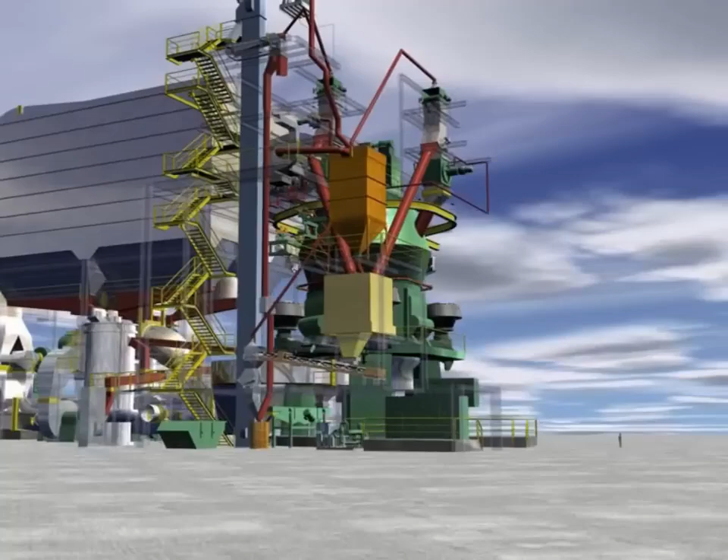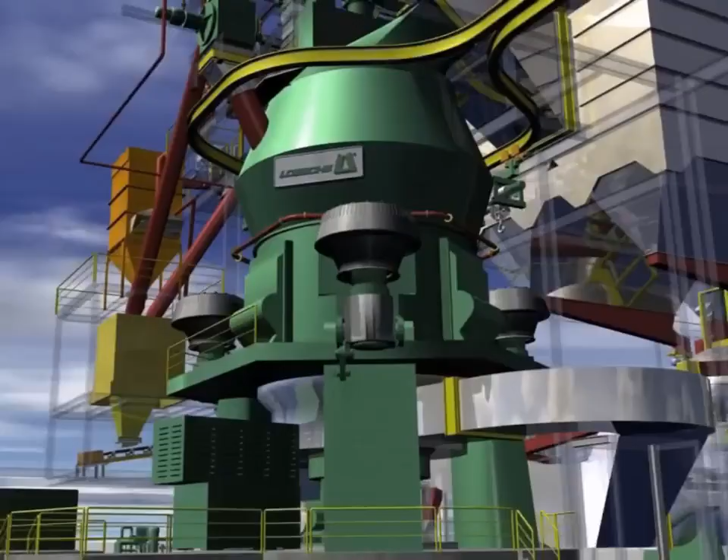Here you see, in the form of a 3D project presentation, a complete cement grinding plant equipped with an LM 56.3 plus 3C for 260 tons per hour OPC. This modern CAD method is the current state-of-the-art at Loesche for the planning and design of entire plants.

What we are now going to show you is a flow sheet of a cement and blast furnace slag grinding plant using an LMCS Loesche mill. The number of bunkers reveals immediately that both single components such as cement clinker and blast furnace slag can be processed, as well as mixtures of these in combination with aggregates.

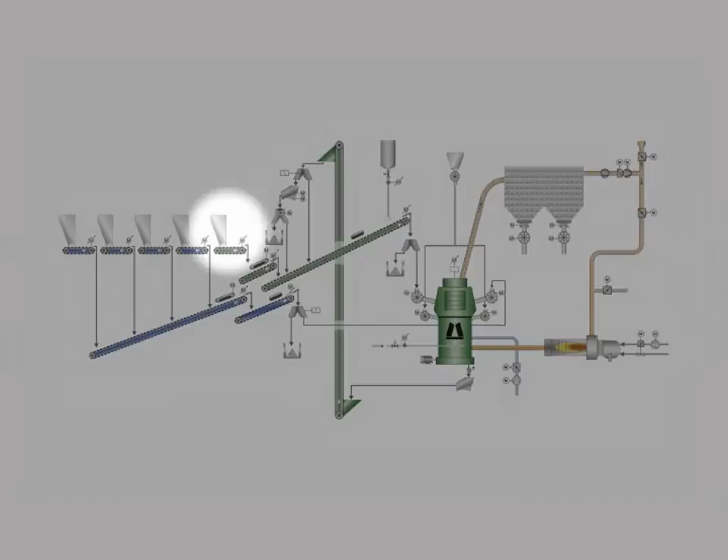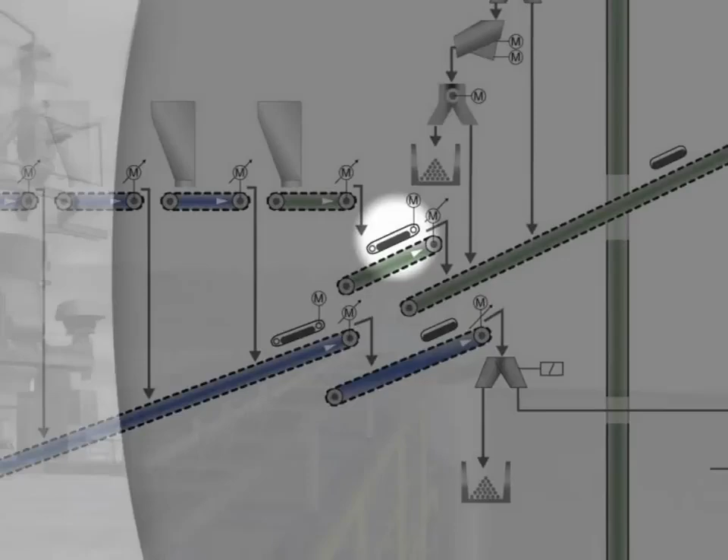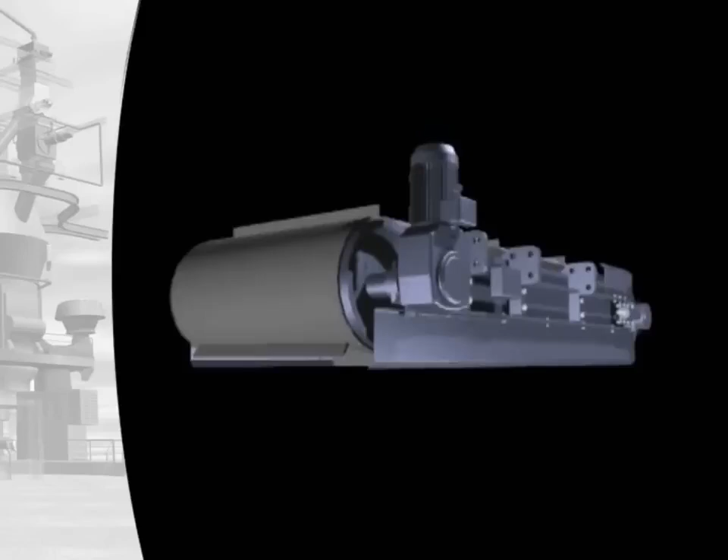Dry cement clinker is drawn from this bunker by a conveyor-type weighing machine. On the subsequent conveyor belt, foreign ferrous matter is separated by a transverse magnetic separator arranged above the belt. Non-magnetic metals are removed by a metal detector.

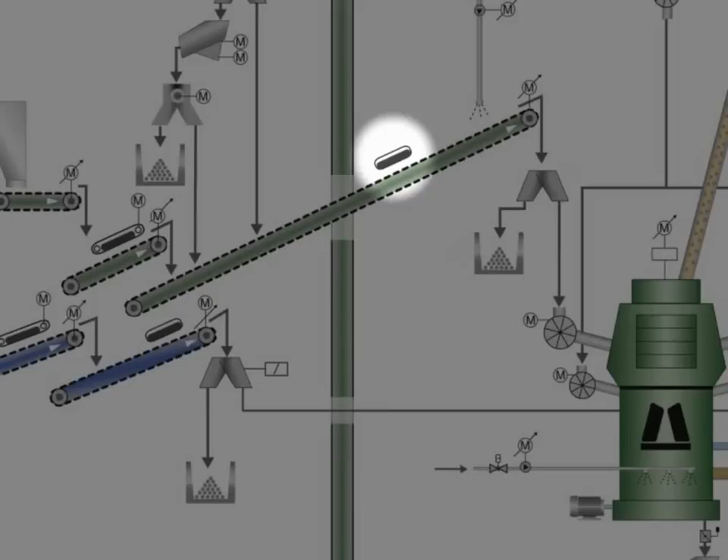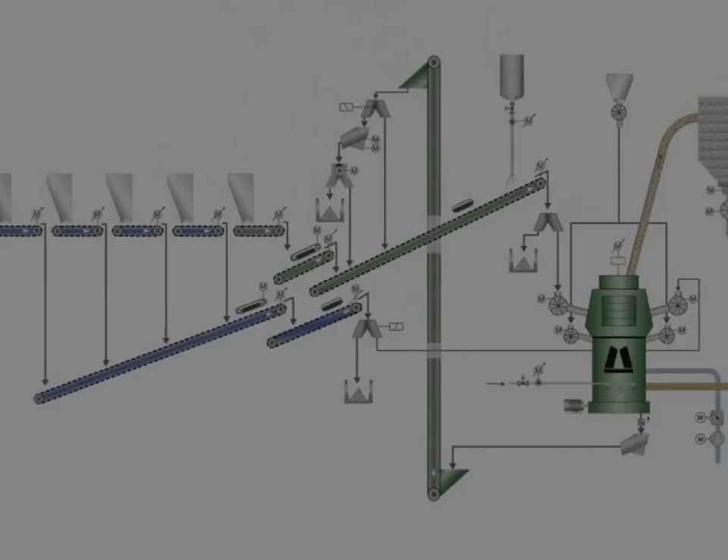These non-magnetic metals are disposed of by deflecting material from the belt. The material to be ground, now free from foreign matter, continues along a further conveyor and goes through the rotary valve and arrives in the Loesche mill. Moist material to be ground is treated in a similar manner.

Extremely fine and dry aggregates, in particular fly ash, are fed from a separate bunker into the mill through separate conveyor lines. Grinding aid stabilizes the grinding bed and is used at the request of the customer.

The water injection system is intended to condition both the grinding bed and, if required, the hot gas flow. The necessary process gas for the mill is produced by a hot gas generator. The flow of hot gas dries the ground material and conveys it to the classifier.

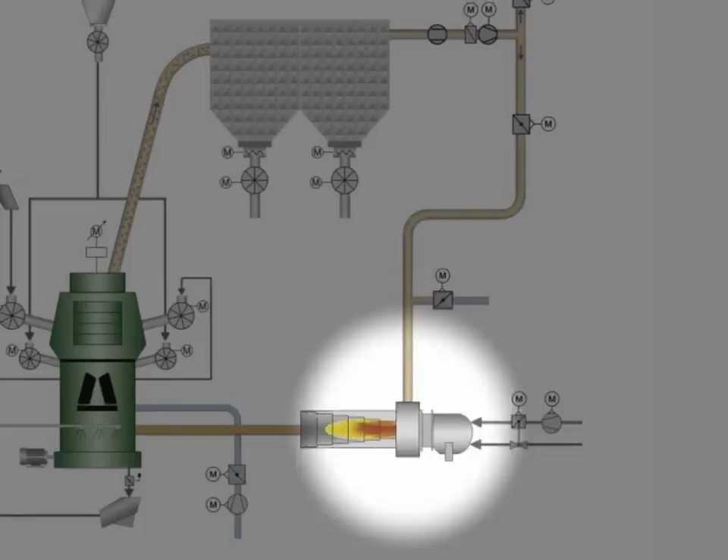The mixture of gas and pulverized material leaves the classifier and is separated downstream in the filter. The clean gas is discharged through the chimney. For energy-saving reasons, part of the process gas flow is recirculated to the mill via the hot gas generator. The fan conveys this gas through the entire plant.

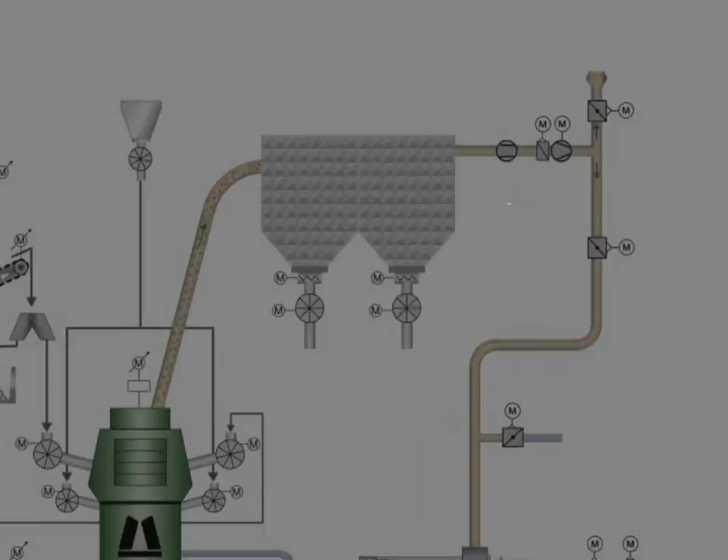Any coarse material rejected by the mill is recirculated by means of a bucket elevator to the long conveyor belt of the reject system.

The principal element of the above described grinding plant is certainly the Loesche mill with its classifier. Here are the main components.

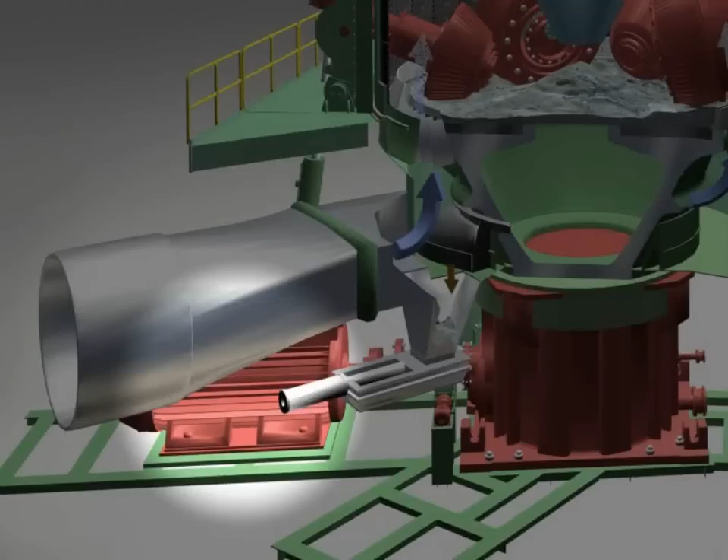An electric motor serves as a drive for the mill gearbox via a coupling. The grinding table is supported and driven by the gearbox.

The material to be ground flows over wear-resistant grinding plates that are installed in the upper surface of the grinding table. The grinding bed is crushed as it passes beneath the stationary rollers.

Cement clinkers and blast furnace slag must be crushed to grain sizes of between 2 and 50 microns. These ultra-fine products, in the form of dust clouds in a highly aerated condition, can only be kept under control by taking special precautions.

The grinding bed is de-aerated and compressed by small preparation rollers. The actual grinding is performed by large grinding rollers under the application of high pressure.

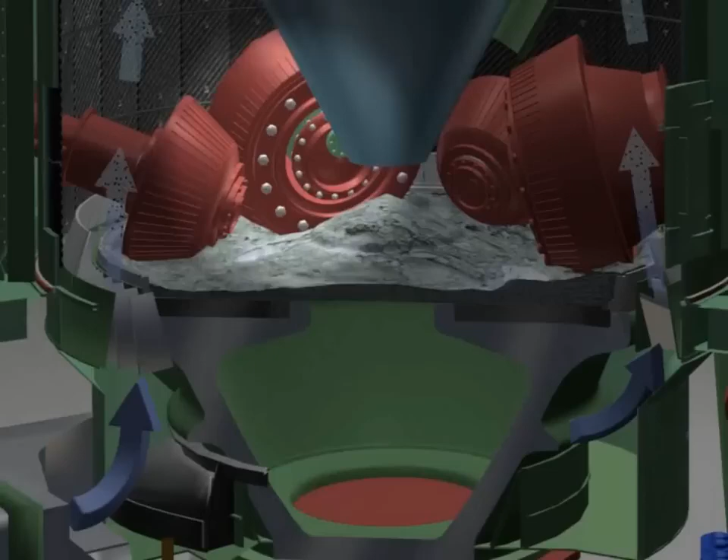All rollers, mutually independent of each other, are precisely guided in rocker arms and are supported by the structure of the mill.

The grinding table sits in a gas ring duct that is supplied with hot process gas through the gas ducts. The hot gas is directed into the grinding chamber through a louvre ring.

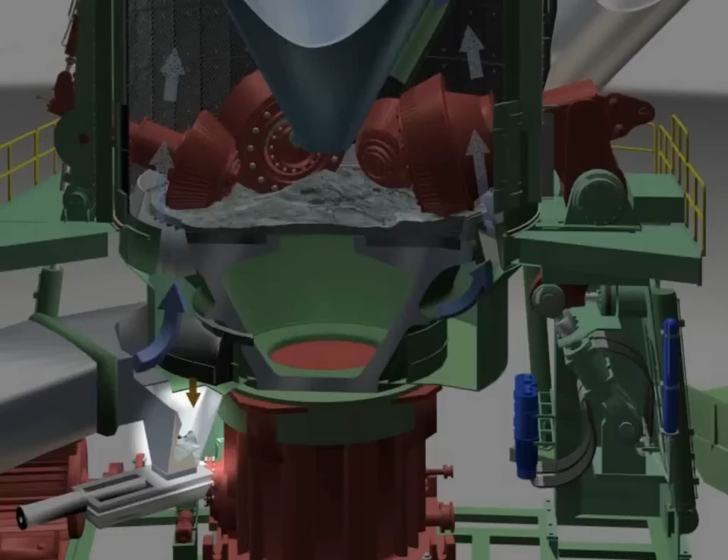The rejects drop through the louvre ring into the ring duct and are removed by the rotating scrapers. The ground material is dried in the hot gas stream and is conveyed to the classifier.

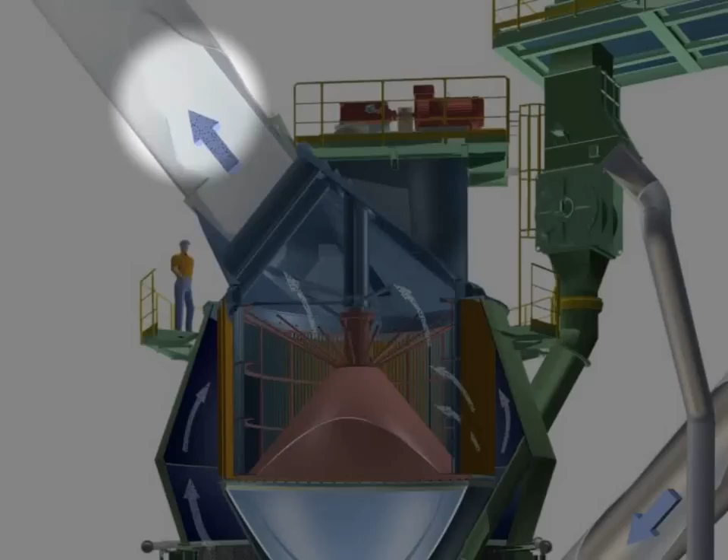The finished material passes the classifier and the mixture of gas and pulverized material flows through the ducting to the filter.

Oversized material is rejected by the classifier. It drops through the grit return cone back onto the grinding bed, where it mixes with the feed that is supplied to the mill through the rotary valve and the feed chute.

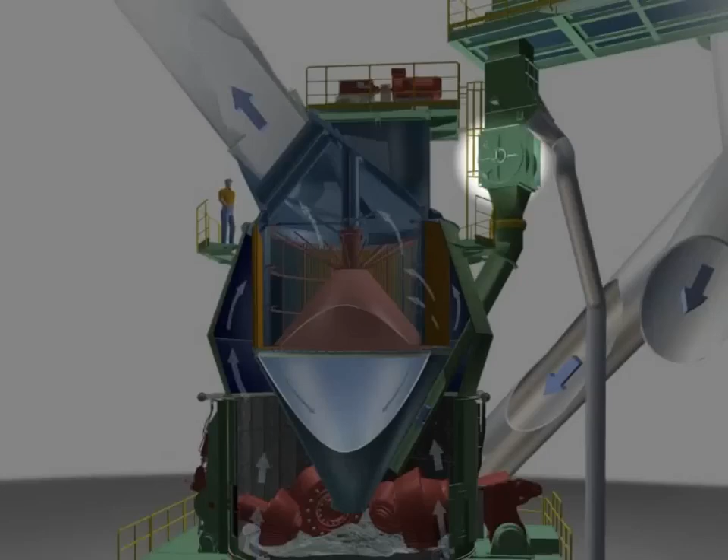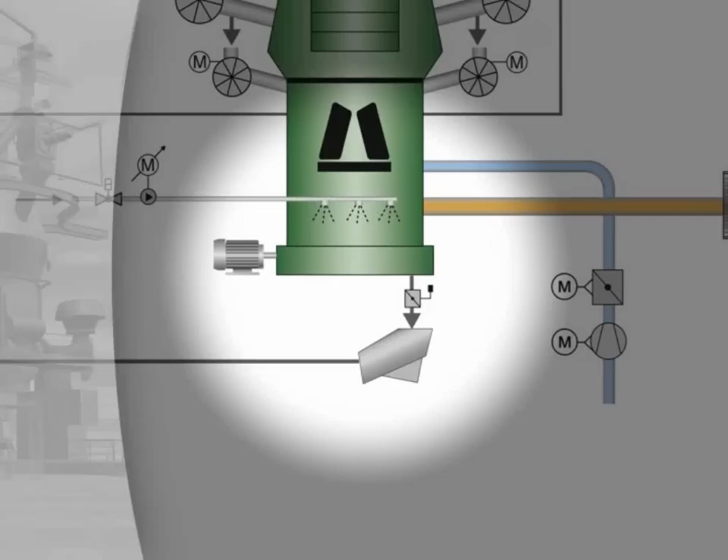Loesche mills are conceived to be service-friendly. The gearbox and rollers can be installed and removed without dismantling the mill.

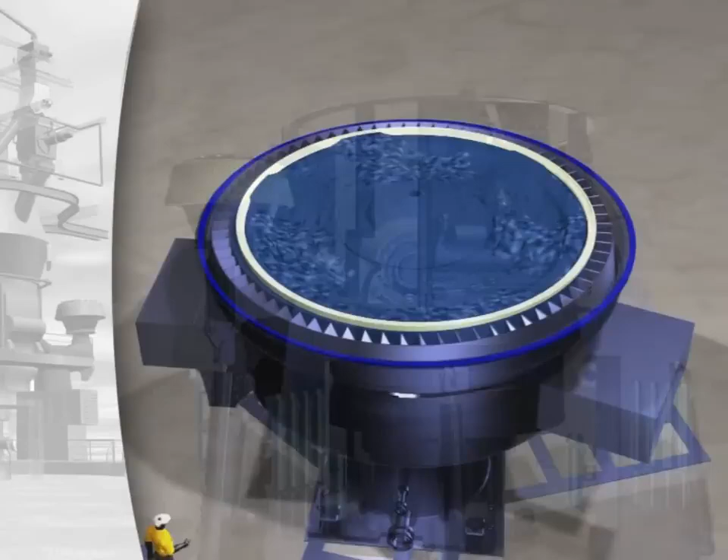The grinding plates, with swing-out rollers, are also readily accessible for quick exchange.

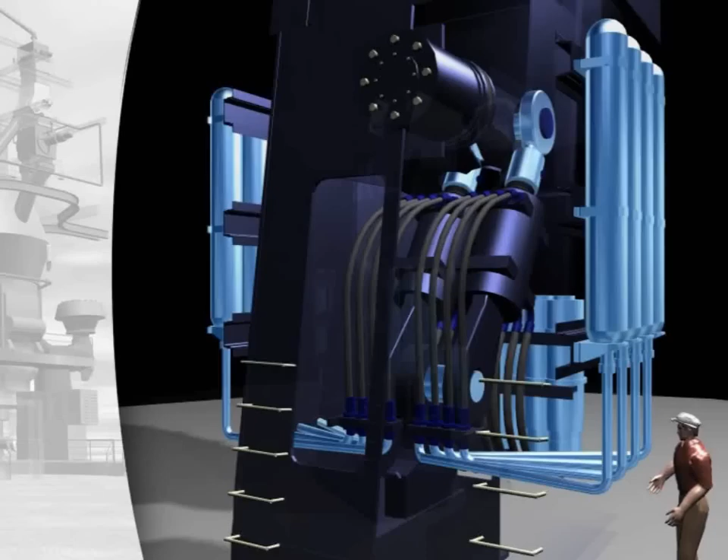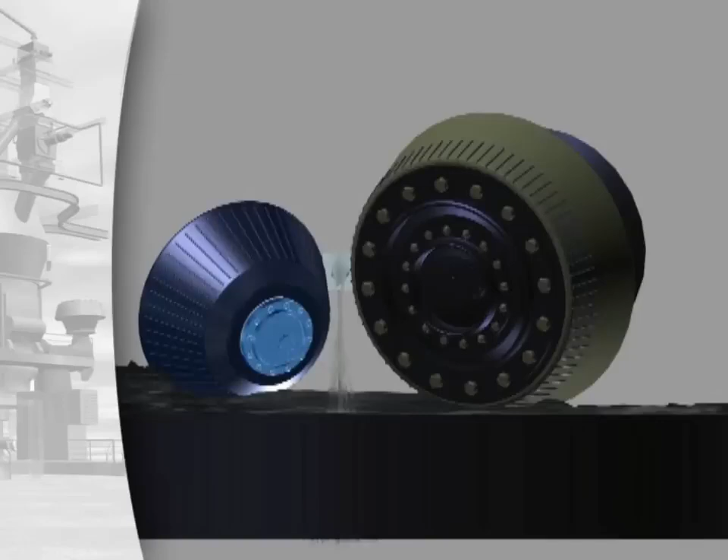The components of the hydro-pneumatic spring system for the rollers are installed in a pedestal outside the grinding space, where they are also freely accessible during grinding operations. Here you see the interaction of the preparation roller and grinding roller, and also the water injection between the rollers.

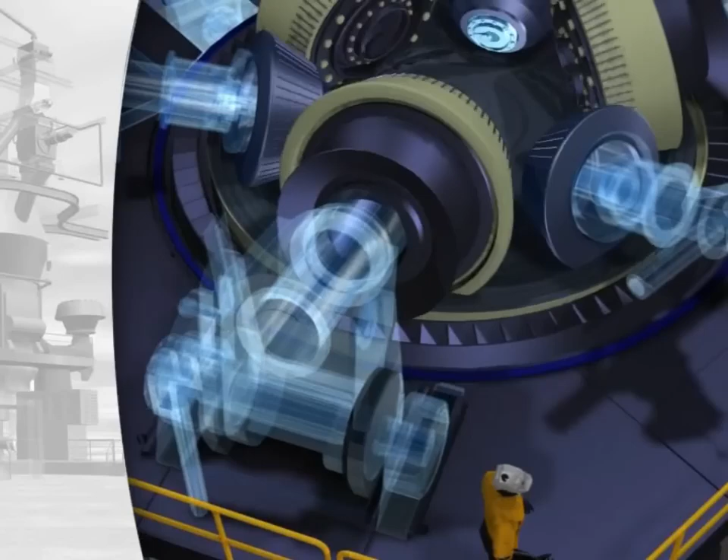A classifier, a type LSKS dynamic classifier, is installed on top of the mill. A static guide vane ring surrounds the caged rotor inside.

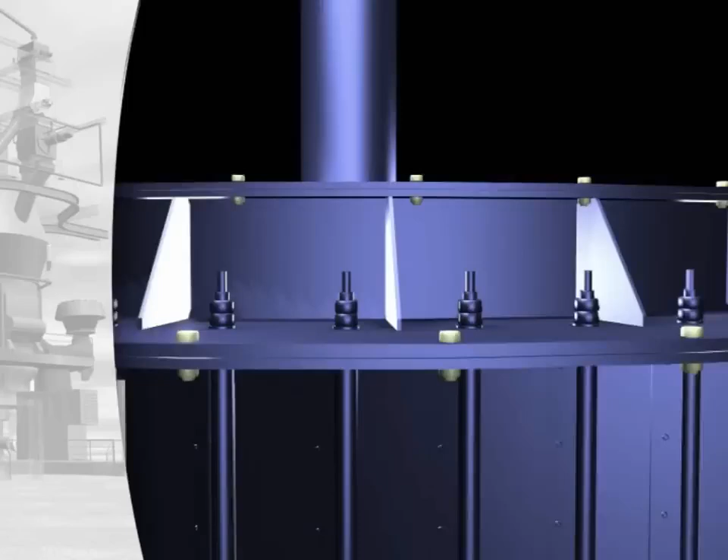The rotor is driven by a motor and gearbox unit.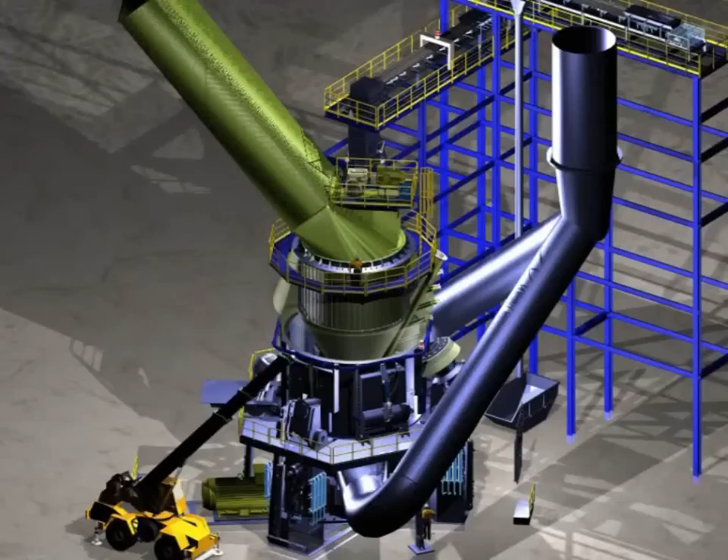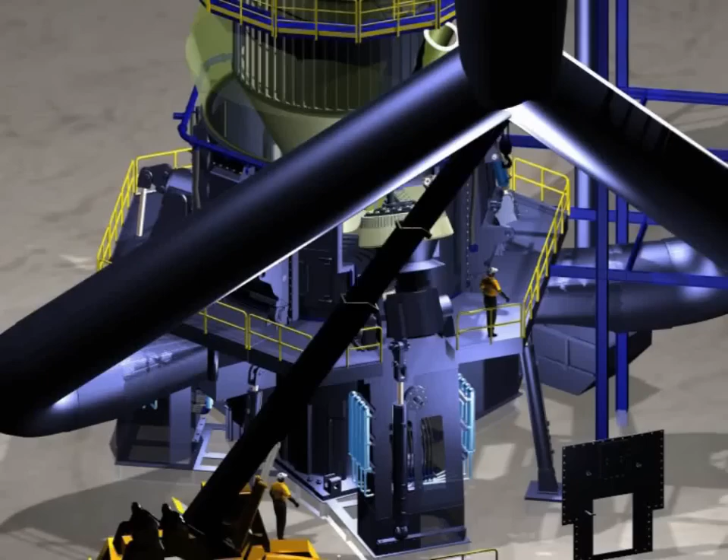The modular structure of the Loesche mill permits separate servicing of each single roller. In the swung-out position, grinding components or rollers can be quickly exchanged.

And this is how the particle flow develops in the grinding chamber and inside the classifier.

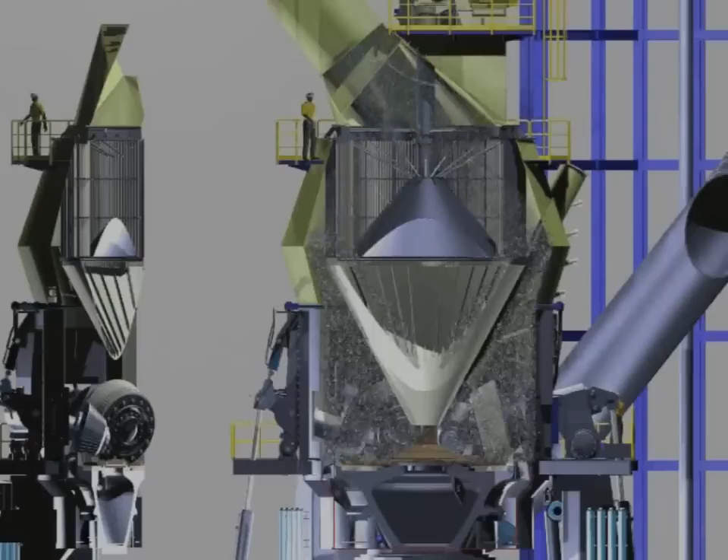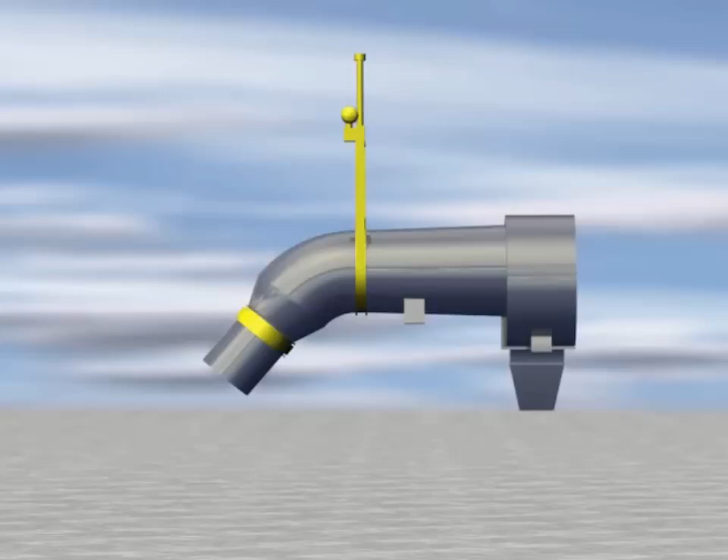The Loma firing system was developed by Loesche in the mid-60s. It consists of a firebox made of high-temperature steel equipped with a small muffle. The process gas passes through the spiral casing into the firebox where it is heated up.

It penetrates through the annular gaps and boreholes of the perforated shell into the center of the firebox named Loma heater, where it mixes with the hot flue gases. The steel shells are cooled by the process gas flowing through the firebox to the effect that a refractory lining need not be provided.

The technology of cement clinker and blast furnace slag grinding in roller grinding mills has been introduced by Loesche. It saves both energy and material resources and is environmentally friendly.